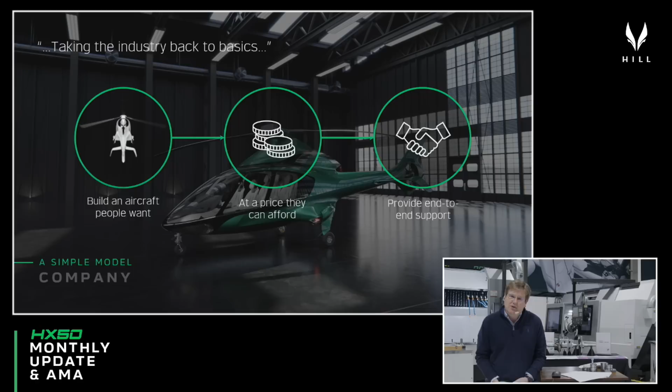So let's make a start with the outlook. Essentially, Hill Helicopters is a company that's taking the helicopter industry back to basics. Our business model is really very simple: build an aircraft that people actually want, deliver it at a price point that they can afford through our vertical integration strategy, and then provide the levels of end-to-end support that customers buying premium products from around the world really expect. It's that simple. And when you do that, the market responds.

As of today, we've sold 540 HX50s, 116 HC50s, and quite honestly there has never been a better time to join our movement and purchase your own HX50. We've got vast pent-up demand in our sales pipeline. I think we're up to nearly 4,000 people now that are just waiting for us to hit a specific gate in the development program, and then they're in. Couple that with the fact that the pound is at a 40-year historic low against the dollar.

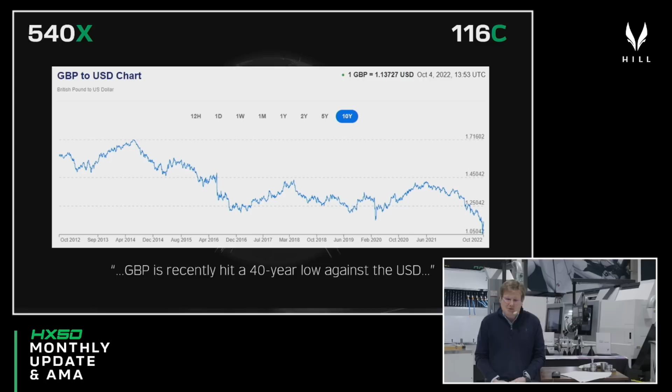Now really could be the time for you to come and join us. And what I'll do tonight is give you a good reason to join us by showing you how we're developing across the program. So those of you in the UK will be aware that our global headquarters, our 335,000 square foot production facility, is currently going through the UK planning process.

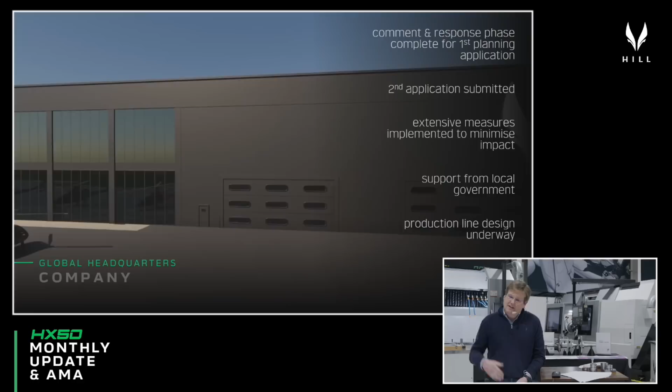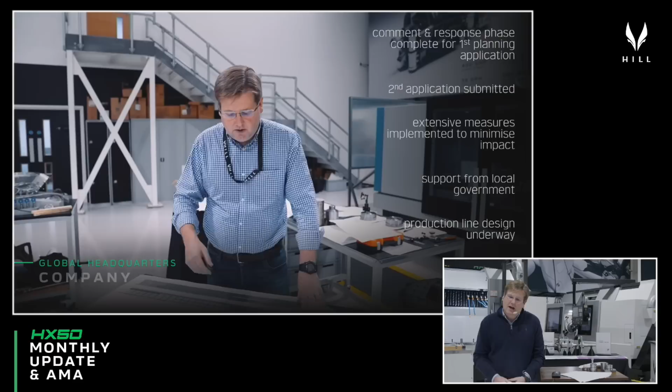Our first planning application, which deals with an existing application for an industrial building on the site, is in the system. All the comments and response phase of that program is now complete, and that's waiting for the second of our applications, which deals with the flying aspect of the heliport we're building, to be submitted. That is being submitted over the next couple of days. They're just dealing with a couple of last issues, and then that will go through, and we expect some feedback from the planners early next year.

To put those in the UK and in the area's mind at rest, the building really takes every opportunity that modern technology affords to minimize the impact our operations have on the local environment. A lot of the operations that traditionally would have been potentially noisy will be done within the building or within acoustic chambers within the building. So we really are going to be the friendliest neighbors possible. We've had great support from the local government, and we're very much looking forward to getting started on building this impressive modern manufacturing facility.

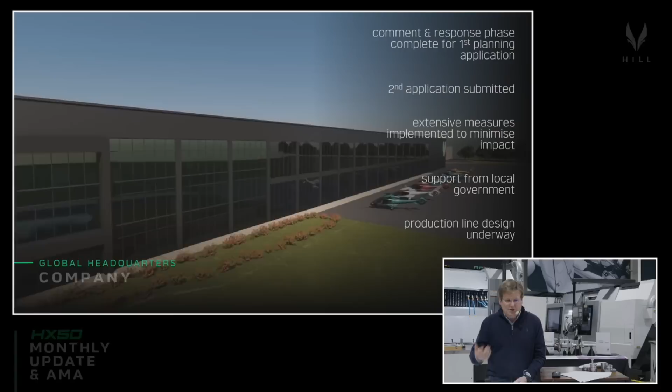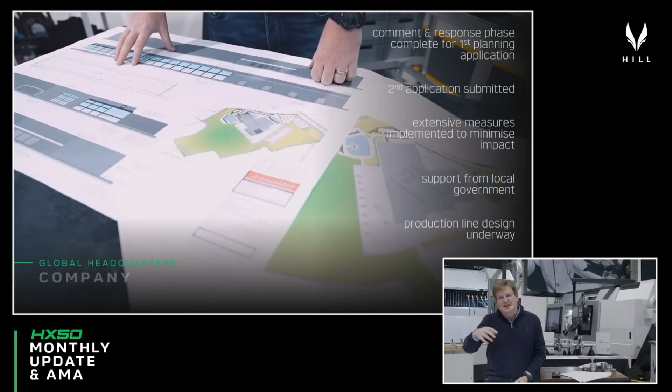To support all of that, it's one thing having planning permission for what amounts to a big box, but there's a huge amount of stuff that has to be done to develop a state-of-the-art helicopter production facility. We've recently taken on a new lead engineer to support us in developing the production, the development of the assembly process, how we organize and manage ourselves throughout production, and the logistics that support all of those activities. That work is now underway, which supports the detailed design of the factory building itself and the support services that go into that.

The event that we've just completed was very much a watershed moment for the company. When a development program is in its early phases, the business needs to be an extremely agile, flexible and relatively unconstrained operation to nurture and support widespread innovation in all the areas you need to create something like HX50. Our organization and the way we operated really reflected that.

Upon getting to the recent event, we've now reached a turning point in the way the business needs to operate, because the design, the systems and the manufacturing processes are sufficiently mature now that we really have to change gears and work in a different way that's much more disciplined and controlled, supporting faster and more efficient progress as we focus on showing compliance with all the necessary regulations we have to evidence that we meet for this thing to be allowed to fly.

So off the back of the event, we've essentially completely reorganized ourselves and upgraded the way we operate as a business into a much more focused and compliance-orientated organization. Sounds very boring, but it's actually really important for what comes next, which is taking those designs and systematically going through them, testing them, proving each part, each subsystem, each assembly, and then the aircraft at large is fit for purpose and robustly meets the very latest airworthiness standards. There's been an awful lot of work going into that over the last couple of weeks.

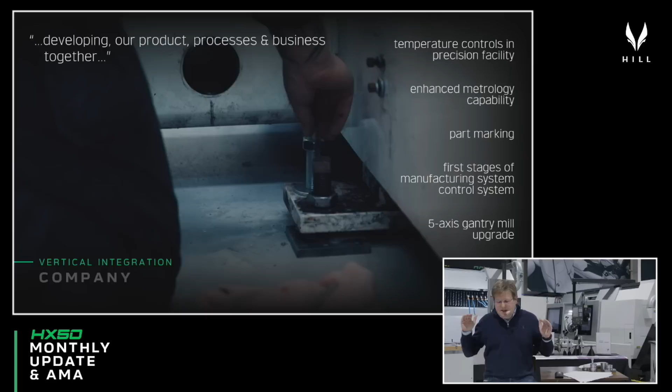In addition to that, as you know, we are simultaneously developing the product, the processes that make the product, and also the business, all in parallel to give us the most expeditious route to market. There's a number of things that have been going on in DC1, 2 and 3 over the last month to enable us to do these things.

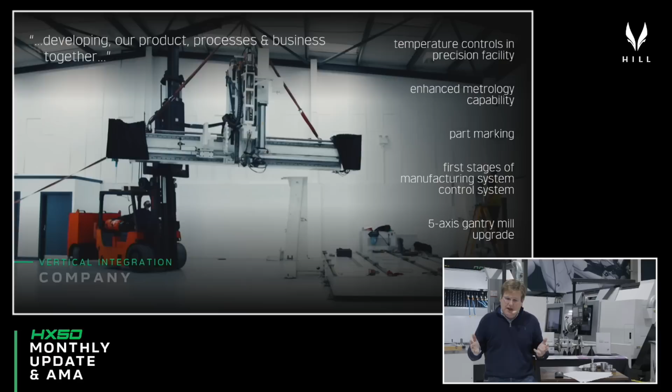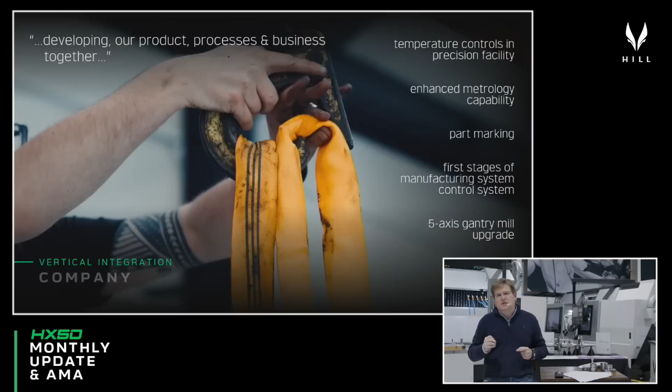One of the things you might notice when you look around the facility here is that we've put temperature controls and air conditioning in throughout the precision engineering facility. You'll have been following that we've been doing a lot of work developing high quality aerospace grade gears, bearings and other precision components. When you're working to the tolerances we need to deliver premium quality, reliable components, you really do have to control everything. So we've put temperature controls in so all the materials are long soaked at the right temperature and stored at a controlled temperature. The machines themselves have stabilized over weeks to a controlled temperature. Even the coolant, the cutting tools, and everything that touches the part is stabilized at a controlled temperature, because when you're chasing single figure microns to make these components, nothing can be left uncontrolled. Otherwise you simply won't be able to do it.

So all of that work has been completed here at DC1, and we're now in a position where we've got the level of control we need over all of these things to repeatably produce these sorts of precision components. We showed you probably two or three months ago that the first of our CMM measurement equipment was delivered. That was really a machine to get us started, handling the bigger, less sophisticated, less tightly toleranced components. While most of the attention is now focused on producing gears, bearings and super high tolerance parts, we need another level of measurement capability beyond that.

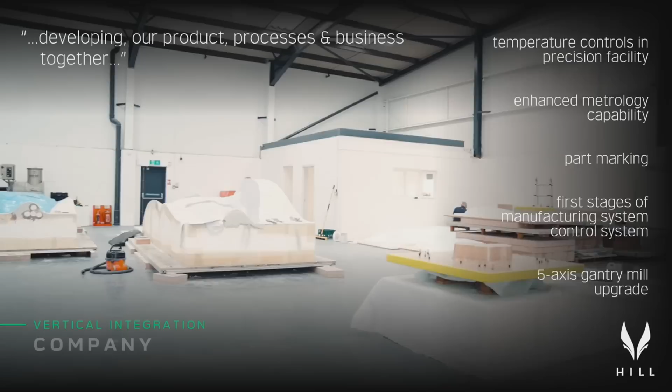So we'll soon be receiving a Hexagon CMM machine, which is actually capable of measuring down to 0.1 of a micron - that's 0.1 of a thousandth of a millimeter - is the accuracy that machine can work to. We're also shortly going to be taking delivery of some very specialized bearing measurement equipment, so that not only while we're developing the products, but also when we're in production, we can measure production items really quickly so that nothing slips through the net from a quality perspective.

We've also invested in part marking systems. We're producing a large number of parts now, and it's important that we can part number them, serialize them, and track all of the parts as they progress through the production process. So part marking and laser engraving is one side to it, but you also need to introduce the manufacturing system control systems as well, and all of that work has been going on in the background.

We're taking a very light touch to that at the moment before we step up to production grade systems, just to keep it simple, agile and responsive as we go through this phase of development.

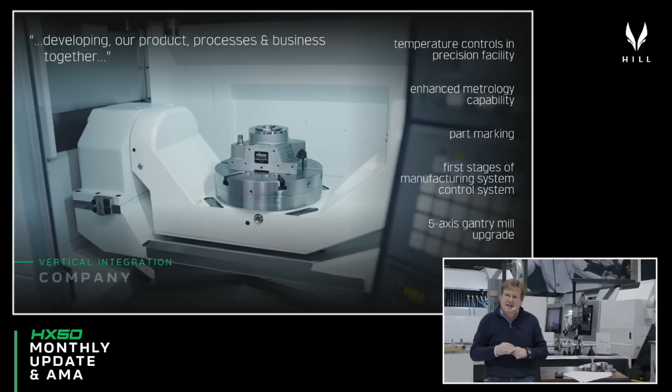The other big news in terms of infrastructure development over the last month is our beloved 5-axis gantry mill machine, which was responsible for producing all of the patterns that built the first set of molds for HX50, is having a brief break, and we're giving it a well-deserved upgrade. We're reconditioning the spindle, the ball screws and bearings, and getting that machine set up for a long slog in production over the coming years.

Over the course of the next 3 to 4 weeks, we should be restoring that machine to as good as new condition, ready to make the production patterns, production foams, production trim tools, and all of that great stuff, as well as doing the trimming on the first carbon fiber HX50 fuselage. Really pleased to see all of that coming together for us.

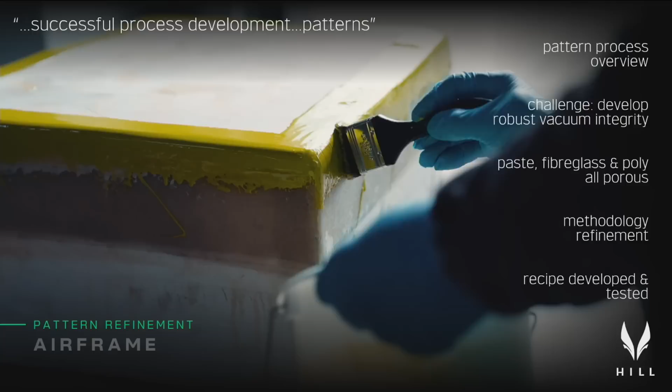Let's now dive into the airframe, and I'll give you an update on how the team's been developing the HX50 monocoque and all of the technologies that go into producing cost-effective, high-performance composites.

You will have watched over the event that we held recently, where we've essentially pulled a range of processes from a number of different industries to fuse industrial levels of cost effectiveness with aerospace grade performance and quality.

Our process is really largely borrowed from the boat building industry, where we take low cost materials to make the patterns, we apply a series of surface treatments - a fiberglass layer, a tooling paste layer - have a secondary machining operation, and then that is the pattern from which we can take our tools to then make the fuselage.

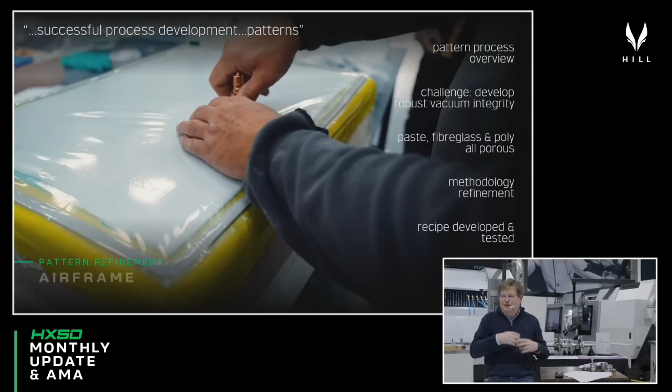One of the challenges with an infusion-based composites process is the fact that you absolutely have to generate vacuum integrity. If you fail to be able to hold a robust vacuum, then you simply cannot infuse.

One of the things that we've been going through and doing very systematically and methodically is the development of the exact recipe that we're going to use for the test fuselages and the production patterns that will go on and make all of your aircraft.

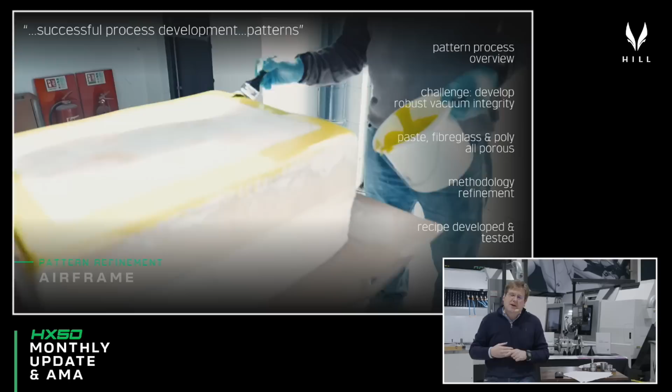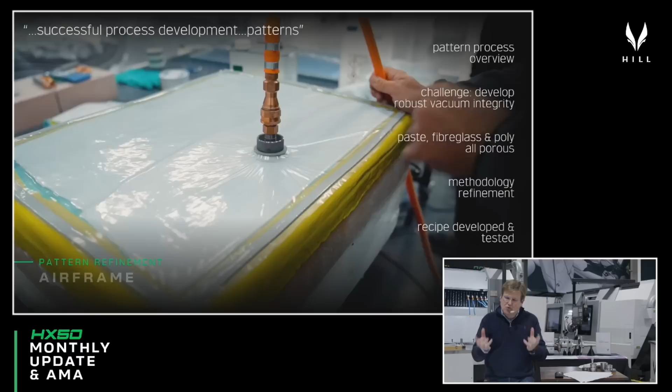The recipe that we've used is essentially illustrated on the slide in the background, where we've had to take great care to make sure that at every stage of the process we're able to create essentially an envelope bag environment around the envelope that draws the vacuum down on the fiberglass.

What you can see over here, if we just move over to this stand, is a small demonstration of the recipe. It doesn't look very sophisticated, but there's a lot of technology goes into this.

So Milan, if you just jump up here a little bit, you can see we've got the conventional polystyrene base, which means we can make vast tools inexpensively. We then have a fiberglass layer on top, which gives the backing material the strength it needs to be robust in operation.

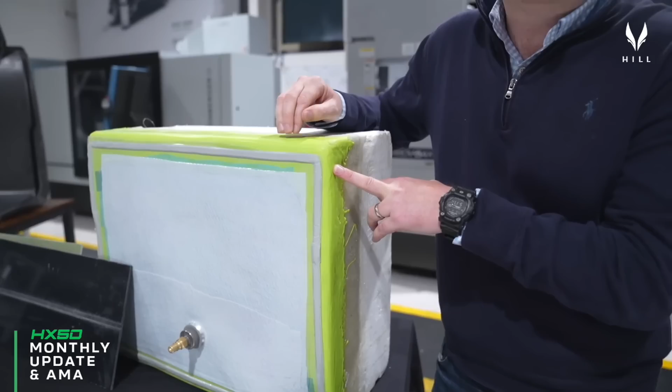And then on top of that, we need to apply a sealant layer, and this is the layer that creates the bottom half of the envelope through which we bag the carbon fiber or glass fiber, depending on what kind of tools we're making.

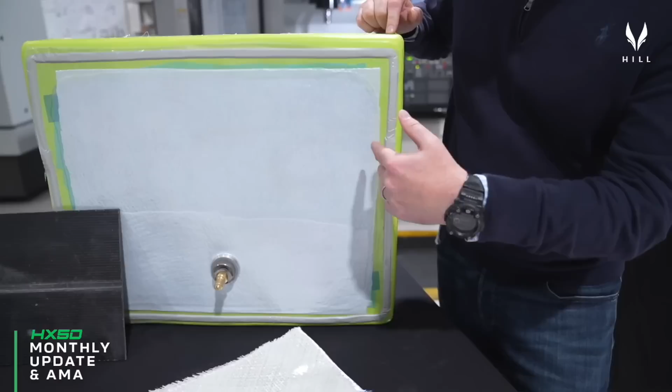What you can see here is that you can apply tooling paste to that top layer, making sure to leave some sealant out to the outside, or we can go directly onto this as we have here. This is a glass fiber mat we've got in there, representative of some prototype development tooling we're making at the moment.

And this vacuum bag has actually held a vacuum now for 2 solid weeks without being connected to a vacuum pump. So, really, really pleased with how this has come together.

And what this now means is those vast patterns that you saw us make on the run-up to the event can now be sealed, and we can produce high-quality, production-grade tools from those relatively inexpensively. So great progress on that front.

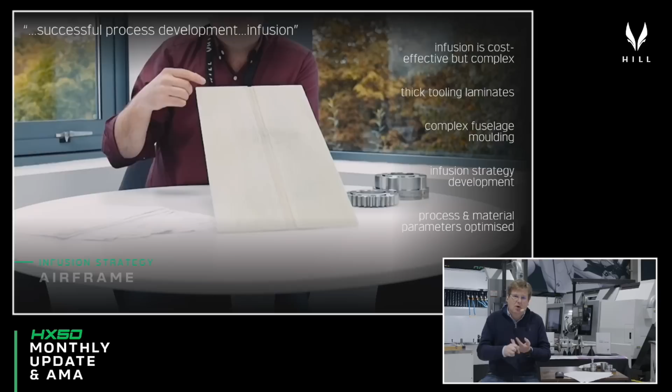The very next stage is to develop the infusion process. One of the key elements of HX50's fuselage and composites is the use of the infusion process, which allows us to come out of the autoclave. It allows us to use inexpensive forms of composite materials and still produce high quality, high integrity mechanical parts. But infusion is pretty tough — it's a more complicated process than using traditional prepregs, and it needs care and effort to develop. Over the course of the last month or so, the composites team have been systematically working through the different process parameters required.

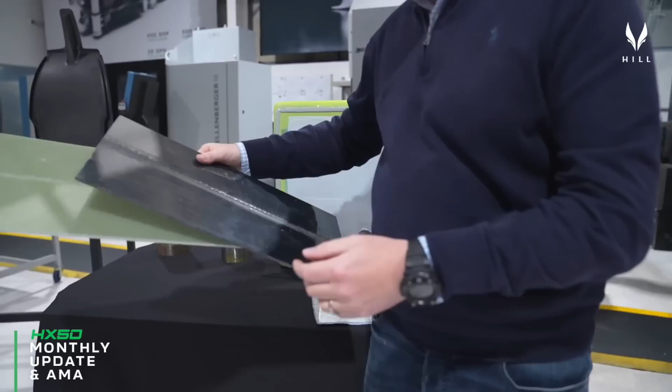Not only to produce the very thin laminates that go into forming the monocoque and the tail boom itself, but also the thick laminates required to produce the tooling and the seal channels necessary to bring those big elements of tooling together. And I'm happy to report today that through the careful selection of the correct fabrics, the correct stack-up of the infusion media, and the correct infusion strategies, we're now able to produce high quality thick laminates in both carbon, which is what the production tools will be made out of, and in low cost glass fiber, which is what some of our development tools are made out of.

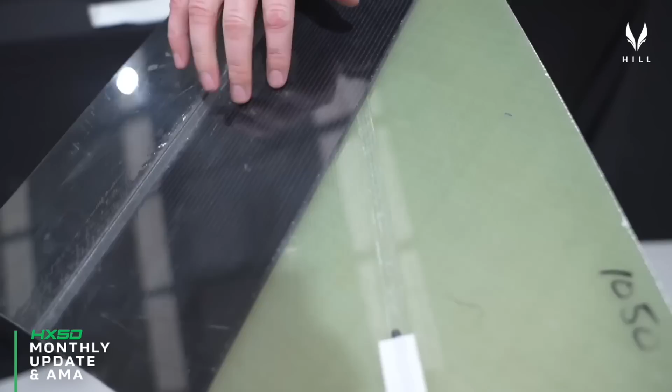You can also see that we're now able to make high quality, high integrity seal grooves within these parts, allowing us to get a robust seal between the individual molds that make up the outer shape of the HX50 fuselage. So all of those key nuanced elements required to make high quality composite parts have now been nailed down into formal processes that we can apply with great confidence as we build these parts for the aircraft.

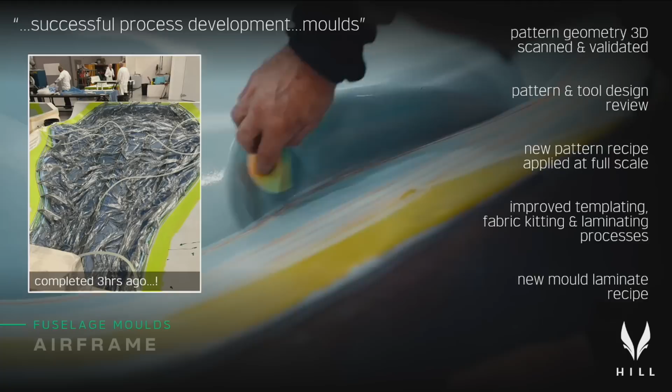One of the other checks we've had to do with the patterns and molds we've been producing is to ensure, like all the other components we make, that they conform to drawing. It's vital when manufacturing parts that you manufacture what you think you've manufactured — the right size and shape so everything fits together and works properly. So to assess the quality of our in-house CNC machining, pattern making and assembly techniques, and all of the surface coatings and treatments applied to these patterns and molds after machining, we've carried out a laser scanning investigation into the A surfaces of all the patterns we've produced.

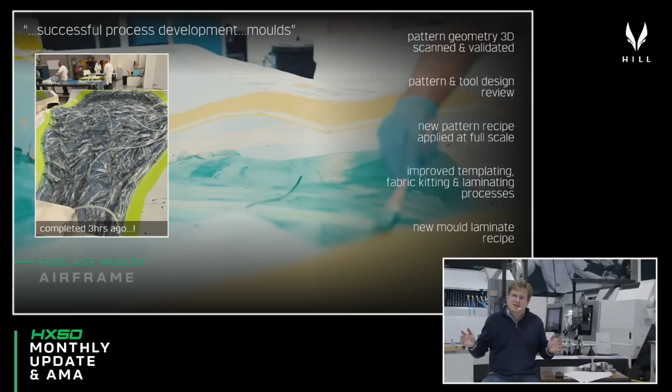So what you can see in the video behind me is a simple laser scanning process that gives us point cloud data, allowing us to see where the parts we've made lie in space relative to what the drawings and CAD models said they should be.

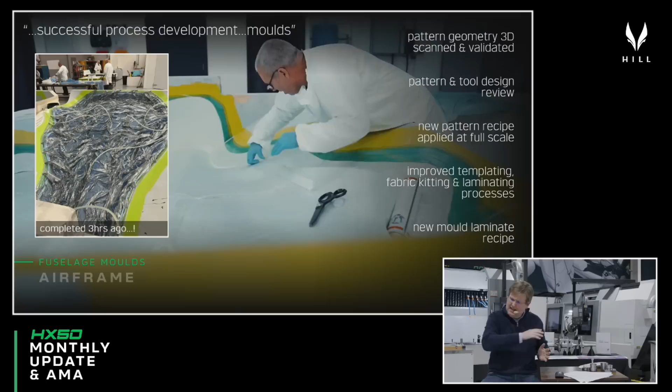What we found is, even working through all of these as absolute prototypes — the very first ones we made — we're robustly holding within 0.5 millimeters in most areas of most of the molds, and in the worst case up to about 1.5 millimeters. For parts of this size with these processes, that's more than good enough for what we need. With a little bit of care, attention and refinement, we should be able to robustly hold around the 0.5 millimeter mark in the production tool. So really, really pleased with how that's coming together.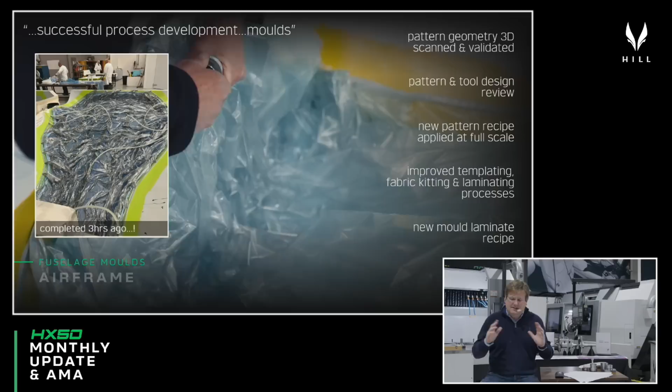Delighted now, we can get those things straight into production and move forward, starting to make this first fuselage. Now, to support all of that, there's a bunch of other stuff you have to do.

We have to get the vacuum bagging techniques right. We have to get all of the kitting techniques so we can cut all the individual pieces of carbon fiber, and in some cases glass fiber, put them together into the stacks we need, and load them efficiently into the tool, getting them to conform to those shapes. All of those processes have been refined somewhat over the course of the last month as well. These aren't quite yet what I'd call production ready — they're not fully automated, still very laborious — but we've got them down to an area where we're really satisfied with how the whole thing's coming together.

So essentially, as of about 3 hours ago, we've taken the first new mold of the belly of the HX50 fuselage using the latest pattern formulation, the latest laminate formulation, and the latest infusion techniques. And that infused beautifully over the course of about 2 hours. I should remind you, that's a really thick laminate, so very challenging for infusion. So that all seems to have gone really well.

Over the course of the remainder of this week and next, we'll be infusing the remaining patterns that are ready to go. And the very next step is that we go and start doing the process development to be able to infuse that first full-scale fuselage.

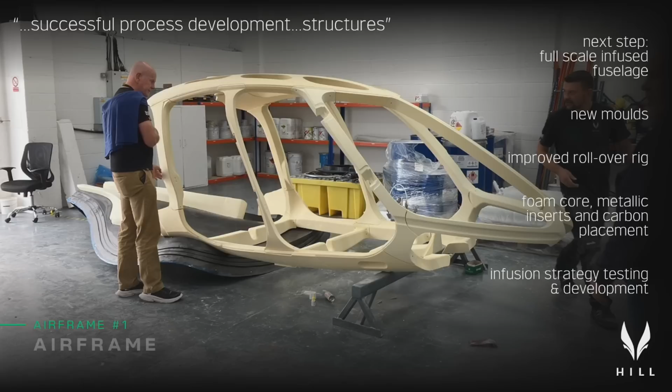So in order to do that, what the guys have been doing over the course of this week is getting all of the foam cores that we've had machined, which essentially provide the guides so that we can lay the B-surface carbon down and create the structural members within the monocoque that we require. Getting all of that assembled, checking tolerances, checking the fit—you can see it there sitting on one of the belly tools that we created previously.

And then we've also got a range of metallic inserts here. These are the inserts that actually get buried within the foam and the carbon fiber, and then these are the things that all of the mechanical components attach to. So this is one of the gearbox mounts that sits on the roof of the fuselage, and we've got similar mounts to mount the tail boom, the undercarriage, and all that other good stuff. So all of these have now been produced, and they're waiting to go into the foams, waiting for us to be able to produce that very first HX50 fuselage.

So really pleased with how all of that's going.

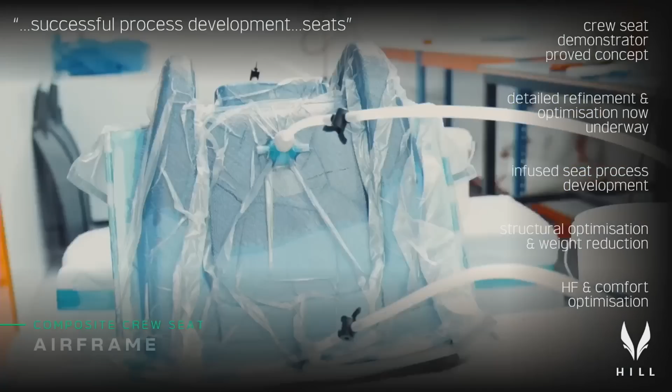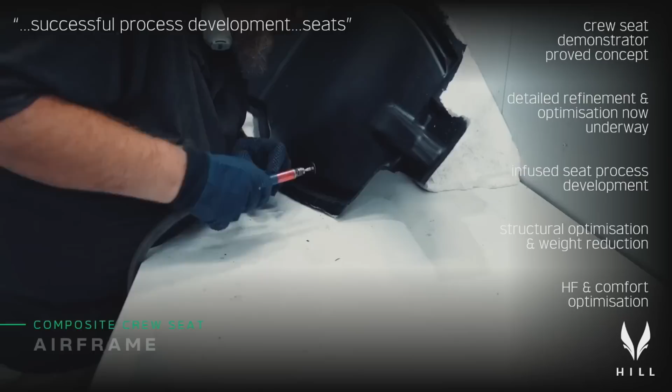During the event, we showed you the very first HX50 crew seat. This was essentially a technology demonstrator, a proof of concept prototype that shows we can produce an infused carbon shell that carries all of the loads we require. Within that, we can nest the mechanical components that house the proven energy absorption devices we've developed, and then machine, sculpt, and shape contoured seating foams, and trim all of that to the level you'd expect in a £500,000 vehicle. We demonstrated all of that, and that was all well and good.

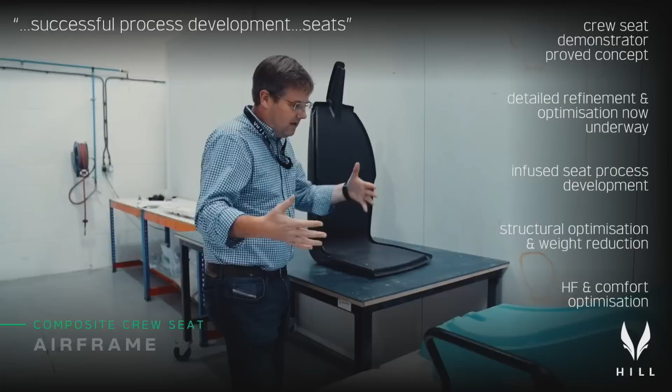But now the real work starts, because now we've got to go and productionize and optimize all of those sorts of things. So what the guys have been doing over the course of the last month has been very much focused on the productionization of the composites. So if we just go over here, I'll show you what we've been doing on the crew seat development.

So what you see here is the technology demonstrator seat that we featured at the event we did last month—a beautifully trimmed, comfortable crew seat that meets all of the parameters we need for the aircraft. Within this seat, we showcased the carbon fiber structural core that goes inside. This is what carries all of the structural loads, keeps you in your seat in the event of a crash and rollover, and transmits all of that back to the airframe. All well and good, but this original one was made with pre-preg to expedite the overall process. So since then, we've been focusing on producing infused parts that get the cost down to a level that's tolerable for a production aircraft.

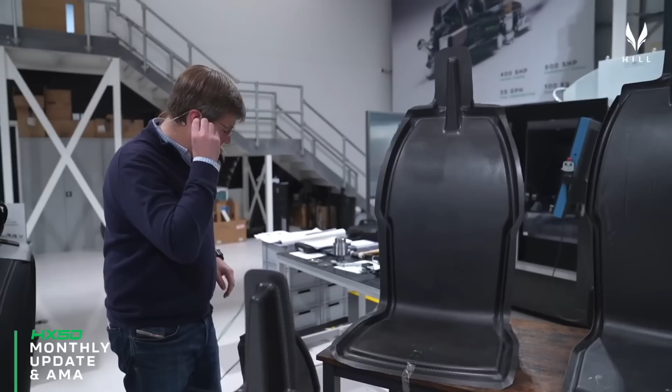So we started by essentially just making the front skin of the seat core. What you can see here is one of the early attempts. It's fantastically light, but this is one of the early attempts with just a couple of plies of carbon in there. And if you look very closely at the top, we've got areas where it wasn't properly wetted out by the infusion process. So we've got carbon fiber there, but no resin, so that fiber doesn't do anything for us structurally.

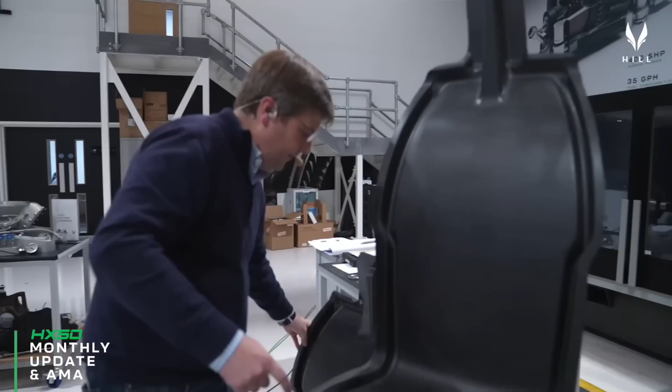So over the course of a week or so, we refined the process, we refined the infusion parameters, and then produced this second example over here, which you can see is fully infused. There's no dry spots here—we've got total composite integrity on this part. And once we've got those parameters locked down, the very next thing that we did is produce a full carbon fiber seat.

So this also has the front skin, but if you have a look around the rear of it, you can see we've got the structural foams in there, and also the B surface that creates the big box sections that carry the bending loads that secure you in your seat in the event of an impact.

Over the course of last month, we've taken the technology demonstrator and essentially proven that all of the production processes we're going to come to rely on produce high quality composites, and also allow us to use the infusion process, which delivers the price point that's vital to us all. Really, really pleased with how that's come along. Let's go back and have a look at what we've been doing mechanically.

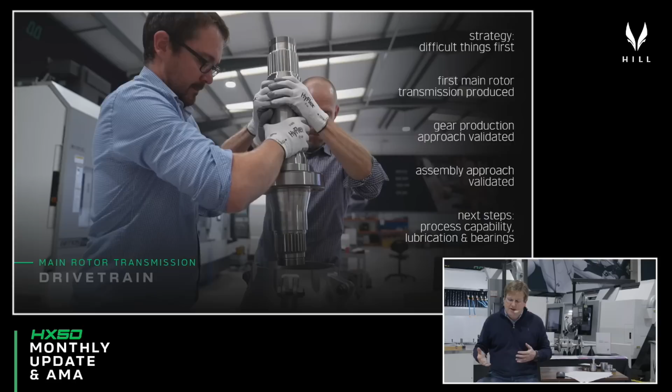So let's talk for a second about the drivetrain development and the GT50 engine. Our strategy has been very clear across the whole project: we do all the difficult things first. In terms of producing a helicopter, helicopters are very much machines rather than aircraft, and the things we really have to produce well and cost effectively are the mechanical drivetrain components and the gas turbine engine. If you can't do that, you can't hit the price point. So that's where a lot of our mechanical team have been focusing their efforts.

On the run up to the show, we demonstrated that we could produce the entire main rotor transmission here on our own equipment, that we could hit the price point, and that we could make these components sufficiently quickly to scale up into production. All that stuff works great. What we've got to do now is progress that towards a production-ready process.

The very first thing we had to do is essentially tear down the main rotor gearbox and go back and inspect all of the components. To hit the deadline for the show, we didn't have time to do all of the inspection we would normally do as part of the prototyping process to validate the dimensional accuracy of these components. So we've taken the gearbox back to pieces again, and all of the gears and critical components have gone off to one of our measurement partners while we wait for our new CMM to be produced.

So the gearbox process has validated the assembly. It's validated that we can produce the gearbox. We've still got the lubrication tests to do on it, which we'll do when we get the whole thing back together again. And what I'll show you now is that we've also validated that we can produce these gearboxes to exactly the tolerances that we require.

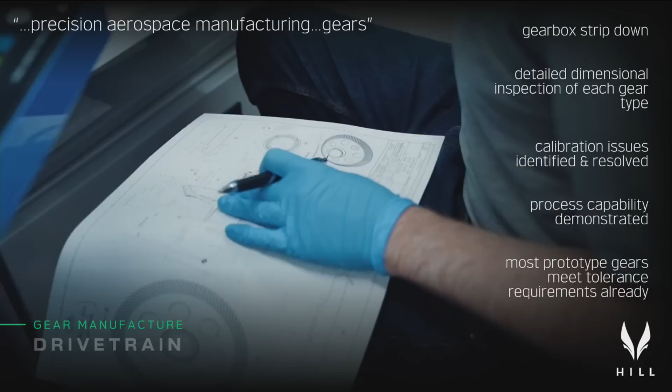Gears are really complicated. When gears mesh together, we have to control the tolerances and geometry of the teeth really carefully so that the load is shared between adjacent teeth uniformly, controlling the size of the contact patch. If you don't do that, you end up with fatigue and wear problems that would be horrible. The level of precision and detail that goes into designing a helicopter transmission is extreme.

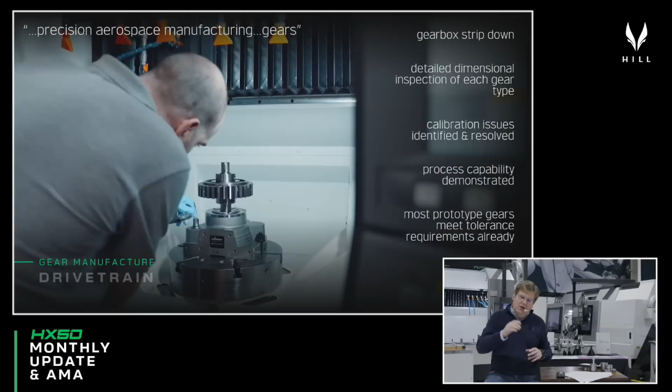So what you can see on the slide behind me is that Mark has taken all of the gears we've produced up to Dontyne, our partners up in Newcastle, and they've been using their gear measuring equipment to profile the geometry of the gears and verify where we are in terms of the tolerance range we've been able to achieve. These are the reports we've had back from Dontyne.

I'm delighted to report that we are currently making gears, even the prototype gears, with the exception of a couple of outliers, all already hitting the tolerances that are conventional for US helicopter manufacturers. So on the equipment we've got here, based on the cost base we've declared, we're able to make these gears and gearboxes, and we're able to do it right now.

So that isn't the end of the process. There's a bunch more process development to be done in terms of the hardening and various other things we need to do. What we've got to do now is go and optimize these processes and see how far we can back off these quality parameters to maximize the productivity of each of the machines.

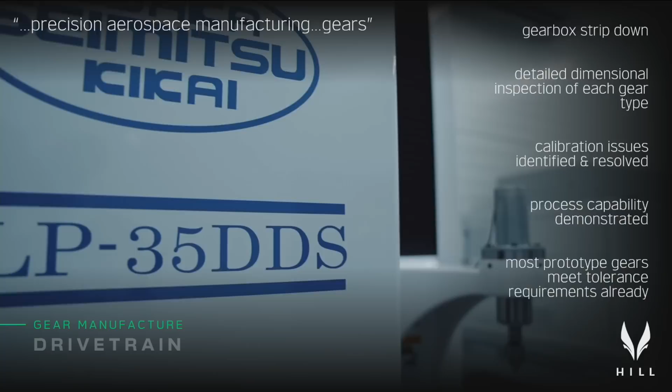We've had a couple of calibration issues, which were fascinating. We were able to see an error in the machine's calibration in the reports on the gears. That's subsequently been fixed. And I should also say that these results were all generated before the latest temperature controls and production controls were put in place here.

So over the course of the next month, we'll do the hardening on the gears, we'll do the hard machining, and we'll also map out process capability so we know exactly where we can pitch these tolerances in production. So really, really pleased to report that we're on top of things with the drivetrain. As soon as the gearbox goes back together, we'll verify the lubrication system, and then we're on to bearings.

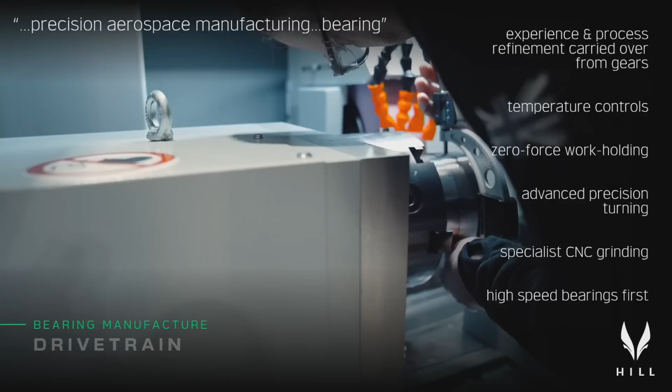In terms of bearings, this is one of the other areas where we've had to take an unusual step for a small manufacturer and produce bearings ourselves. This is very much based on controlling costs so they remain acceptable for the GA market. In the existing transmission we've produced, we've used off-the-shelf industrial bearings just to demonstrate the function of the gearbox and everything else that goes into it. What we're doing now is substituting those bought-in bearings with Hill manufactured bearings.

Over the last 3 to 4 weeks, Mark and Paul have been driving down the tolerances and controls on the bearing races on the first in-house bearing we're producing. We're producing a bearing that will work in this form factor here.

What you can see here is we take raw material, as we do with the gears, and using our CNC lathe, we're able to hard machine this specialist bearing steel down to around 4 to 6 microns, then give it the finishing licks on our CNC internal external grinder. We've developed a range of temperature control processes and some very specialist work holding so that we can support these components in the machine without having to clamp them in a 3-jaw chuck.

If you look at the video, you can see the roughing is done while you still hold it in a 3-jaw chuck, but to get the finished profile into the bearing, it's vital that you don't put any radial distortion into it by clamping it inappropriately. So all of those processes have been developed, and we're currently producing the first of the in-house bearings.

True to form with all of this, we're going after the most difficult ones first. The bearing we're producing is actually the forward gas generator bearing - that's a bearing that lives in a hot, difficult environment and sits at 50,000 RPM for 5,000 hours. That's the one we're doing first, because if you can do that one, you can do any of them. As they get bigger, it gets easier to hit the tolerances.

I've talked to you a little bit about the issues we've been having making sure the secondary air system is as optimal as it can possibly be. Let's go and have a look at the first gas generator we've produced, and I'll explain what we've been doing and why on the actual hardware.

This is the very first GT50 gas generator rotor, and this is a design that's been stable for around 2 years now. We've got a single-stage centrifugal compressor of a very well-known and understood design, a 2-stage compressor turbine, cooled first stage nozzle, and uncooled second stage nozzle.

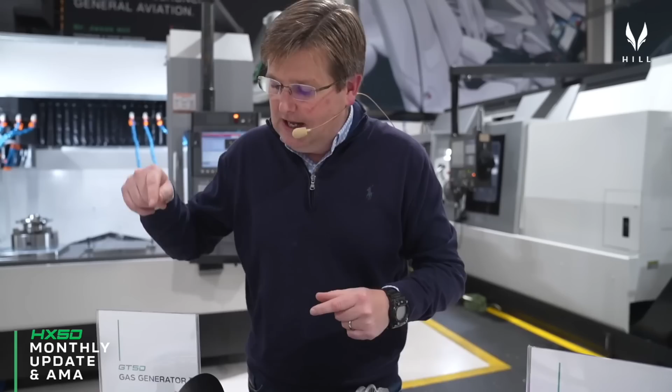Now, the most difficult part about designing one of these rotors is that because they spin so fast, you can only accept a very, very small bearing to support the shaft. Because if the bearings get too big, the centrifugal loads on the balls will become so high that they lift out of their lubrication film and skid rather than rolling, which will rapidly destroy the bearing.

So what we've been having to do, and the implication of that, is that there's a limit to the axial loads you can take on the rotor. So we've been optimizing the secondary air system so that we limit the load on the bearing to just enough. It can't be too big, it can't be too small, it's got to be just enough so those bearings operate in their sweet spot and work properly.

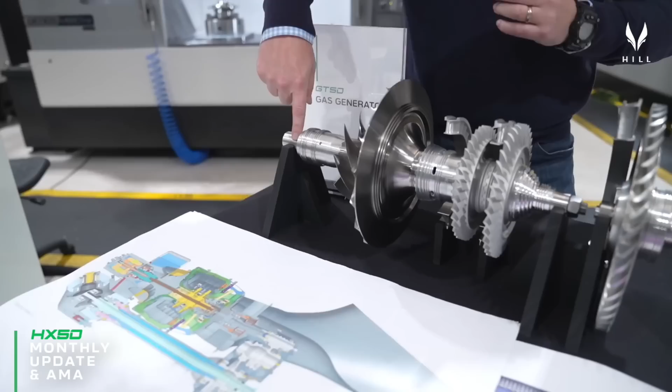Now, what we found is that although the 2-stage compressor turbine is a really sweet, efficient design, it does make the secondary air system more complicated, and it does lead you to a relatively small diameter turbine. So what we've opted to do is move to a single stage compressor turbine.

So this is the updated general arrangement you can see here. We've still got the single stage compressor, but now we've got a single stage compressor turbine to power that. This thing is slightly higher loaded, but with the improvements to efficiency we get in the secondary air system, the overall benefit on the engine is a slight efficiency improvement, even with a slightly higher loaded turbine.

So what that does is shorten the length of the engine, reduce the number of superalloy components we've got to make, and give us a small increase in performance while giving us a much more robust and reliable secondary air system. So that's the work the guys have been focusing on.

The secondary air system is now mature. The updated compressor turbine is currently being respun at the moment, and that will cause a slight growth in the annular combustor as well. All of those things are in hand, and that should allow us to, subject to analysis, freeze the design of GT50 ready for the remaining components of this assembly to be produced so we can get the thing on test. Really pleased to see that coming together.

Let's have a look now at some of the parallel development we've been doing on the manufacturing processes required for the GT50 engine.

We've talked previously about the machined components. You've seen us make the compressor. We've got casting processes in development at the moment to make the superalloy blisks and nozzles. We're looking at 3D printing for some of the other bits and pieces. But one of the areas we now need to focus on is the precision fabrication of superalloys.

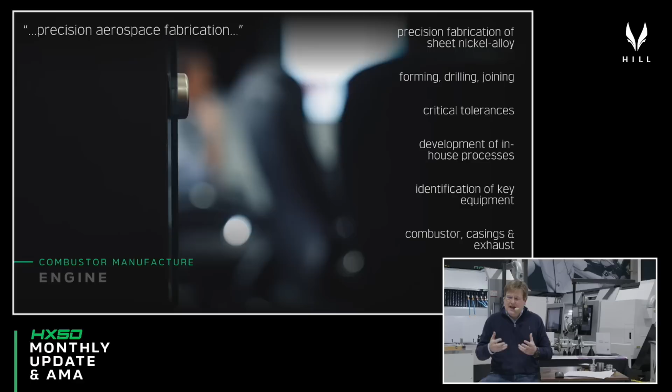So, sheet metal superalloys. And for that, there's a bunch of operations we need across a number of the components in the engine. We need to be able to roll, press, form, drill and join sheet metal components to make ultra lightweight precision metal casings, exhausts, and also the combustor liner.

We've done some exploratory work with a company in the UK to provide a 5-axis machine that can simultaneously weld the individual layers of the combustor together, as well as drilling the 2,000 plus precision holes we need in the combustor liner to feed in the dilution air and also to feed the blanket of cooling air over the metalwork.

We've managed to work with those guys. We've proven that process can do what we want it to do, and we've shown that the economics of that work for us as well. So we're now in a position where we've identified everything we need to make the entire engine. There's a little bit of work left to do on castings, but beyond that, we're in a great place with the engine.

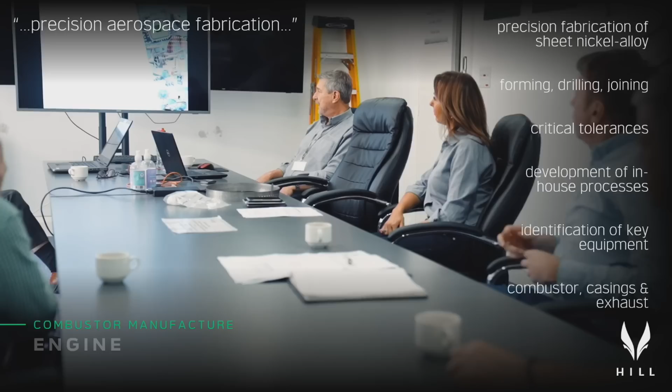In addition to procuring the external third-party machines, we've also been building some of our own equipment. So if we quickly go and have a look at this piece of equipment over here, this is called an expander. The combustion liner we need to make is actually formed from sheets of superalloy nickel. It starts as flat sheet, it's laser cut, and then it's rolled into a circle, welded, but of course that isn't a perfect circle.

So what we need to do then is pop this thing on a machine, and we've got some pie slice tools that go into this machine. This thing's pulled down by a hydraulic ram, and that expands these things so it's perfectly round and to size. Then we can stack these rings together, they go onto a fir tree kind of jig and fixture, and that's when we can put them into the 5-axis laser to drill these cooling and dilution holes, and also weld these things together to form the annular combustor.

So the combustor's well on its way at the moment. We're just waiting for the respun geometry for the new single-stage compressor turbine, and then that's the sheet metal work ready to go out for prototyping. Really pleased with how that's coming along as well.

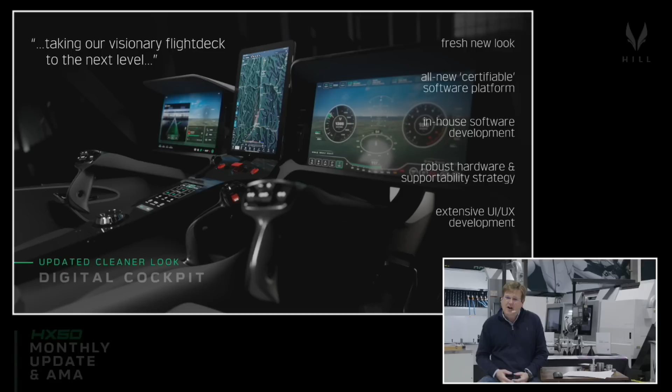Okay, so let's talk about the digital cockpit for a while. During the event, we introduced and showcased a fresh new look for our iconic digital cockpit. The DigiCockpit is a very simple idea: just do what's necessary and nothing else, manage the workload for the pilot, and make VFR flying as simple and intuitive as it possibly could be.

That's the idea, but behind all of that there's a bunch of really technical stuff you've got to get right. Fundamentally, certifying and approving software is a relatively big deal. It's complicated and it's long-winded. So it was important that we built the digital cockpit on a fundamentally certifiable platform. A lot of the work over the last few months has been about transitioning the concept of the DigiCockpit into an environment where we can eventually certify it, and in the short term, approve it for use on experimental aircraft.

We're developing all of the software both for the DigiCockpit UI and UX, and also the interface applications that communicate and control with all of the third-party peripheral systems like the radio, the transponder, the GPS, the AHRS, and all that sort of stuff, developing all of those in-house.

And then, of course, we've developed a much more robust approach to the supportability of this thing in the future. It's no good having a quirky screen size that we can buy today but might not be available in 10 or 15 years' time, leaving a simple fault causing a big problem for the aircraft. So we've dealt with all of those issues and are undertaking a very significant development at the moment on the UI, UX, and all of the underpinning hardware behind it.

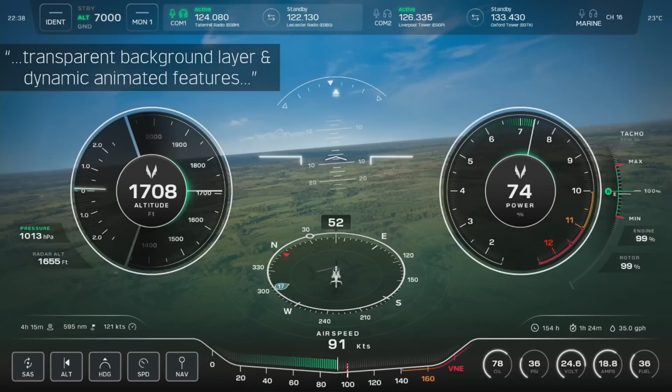So for those of you that haven't seen it recently, the DigiCockpit has got this fresh new look. Same basic concept, but with much cleaner graphics. The key point we're going to talk about today is how we've been developing a layered approach to the DigiCockpit. What you can see in the blacked out areas is the radio bar, the control bar along the bottom, and the fundamental gauges.

Behind that, what we're showing here is a fixed synthetic vision image that represents your artificial horizon. Now that transparent layer can be populated by synthetic vision, by a background 3D computer-generated image, or by a feed from a camera. Over the course of the last month or so we've been developing the technology required to bring all of that together in a way that will eventually be approvable and then certifiable for the HC model, because we want consistency between the two platforms.

The platforms and hardware we're developing are inherently modular. All of the peripheral systems—the radios, the AHRS, the audio panel—are all interchangeable, so we can update the DigiCockpit with no impact on the user, swapping out those units as we see fit in the future. We're presently working with Trig on the supply of radios, transponders, GPS sources, and a bunch of other things, and PS Engineering for the audio panel.

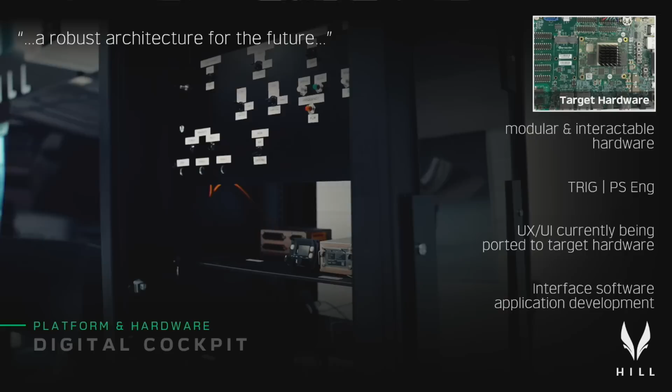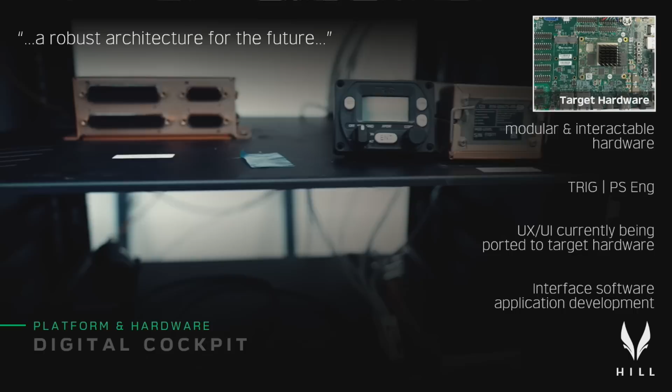We get those questions a lot, so I'll answer that here. We're also in the process of porting the digital cockpit, which has been prototyped in a Windows environment, to the target hardware. What you can see in that little image at the top is the development board of the target hardware that will actually run the UX on the aircraft. We're about to install that on the avionics test bench, which I'll take you to in a second, and get it all connected with the peripheral systems so we can test as we go through development.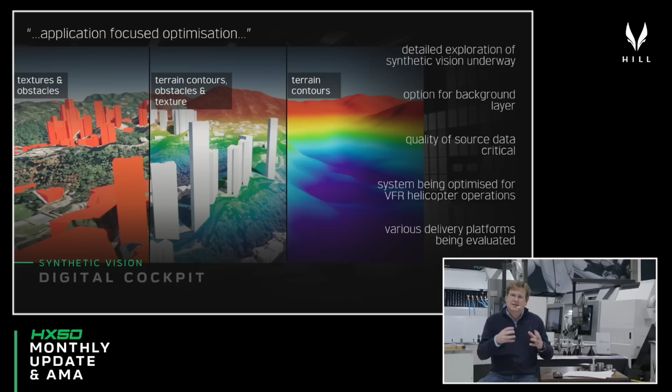One of the areas we're going to showcase for you shortly is synthetic vision. One issue is that a lot of synthetic vision systems aren't terribly well set up for VFR helicopter environments, where we're not overly bothered by the terrain itself—we're much more interested in using the terrain as a 3D context for obstacles, wires, and things like that. Over the last month we've been gathering a source of data for terrain and wires with sufficient credibility to make a synthetic vision system a safety advantage, rather than running the risk of presenting misleading information that people would then come to rely on.

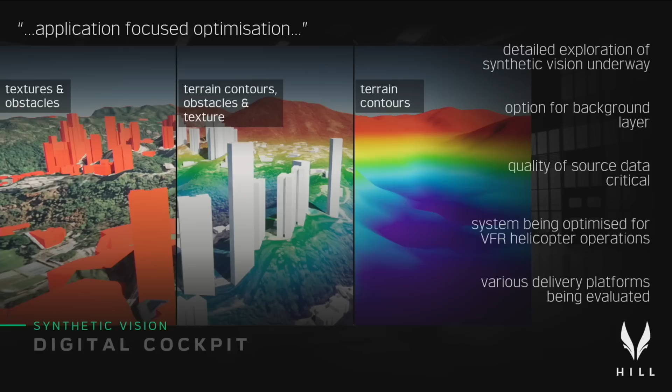So we've been simultaneously sourcing high credibility data to use within the synthetic environment, and then exploring lots of ways we can render and display the synthetic vision environment. These are just some crazy examples I can show you to make the point that you can do anything you want. Our preference at present is muted greys with contour colouring for terrain, and 3D visualizations of wires, buildings and obstacles to draw attention to the things that matter to VFR helicopter pilots. We'll go and demonstrate that in just a second.

All of this stuff is being prototyped and developed on the real hardware, with the actual screens, with the DigiCockpit user interface on our avionics test bench. So let's go over and see Eric. I'll introduce what the test bench does, and he can showcase how initial trials with synthetic vision are coming together.

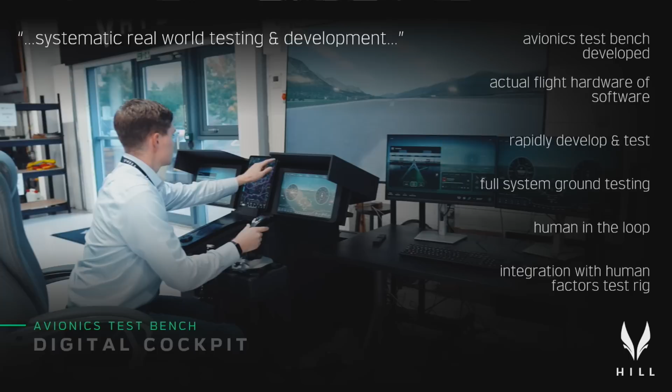So what you can see here is essentially the avionics test bench. The avionics test bench is a simulated flight environment. We have an X-Plane flight simulator running on the big screen, and then we've got the digital cockpit test bench here that Eric's currently operating. On the big screen we've got the X-Plane simulated environment, and down on Eric's screen we've got one version of how we can display our synthetic vision environment.

Don't pay too much attention to how it's rendered at the moment. This is really a technology demonstrator for us to get the mapping, the rendering, and all of the runtime environment working in the background, and eventually ported onto the target hardware so we can assess the level of this stuff within the DigiCockpit environment.

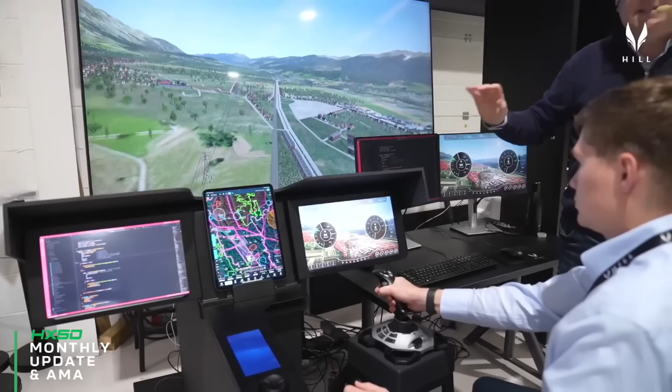What you can see here is that Eric's got a full screen of the synthetic vision, and then we can overlay the digital cockpit gauges on top. There we go - that's live synthetic vision synced with a simulated flight environment, with the DigiCockpit operating over the top. As I say, don't pay too much attention to how it looks at the moment. This is just proving that we can stitch the elements of technology together.

So that's synthetic vision, but this test rig does much more than that. What this does is allow us to verify and test each and every element in the avionics system as we develop it. We don't assume anything is going to work, we don't rely on things working out the box. Everything has to be tested.

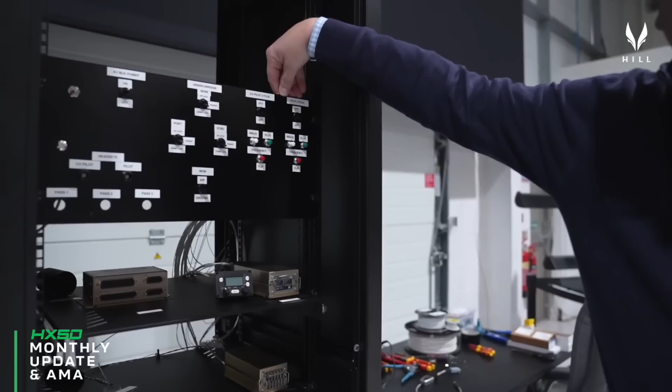So what we've got here is a control panel that simulates some of the flight controls you'd have in the aircraft. The plus and minus buttons and the frequency flip buttons are the buttons you'd have on the cyclic - again, these are just buttons for the test rig, not the ones you'll have in the aircraft. We've got some mode switches up here to control push to talk or hot mic.

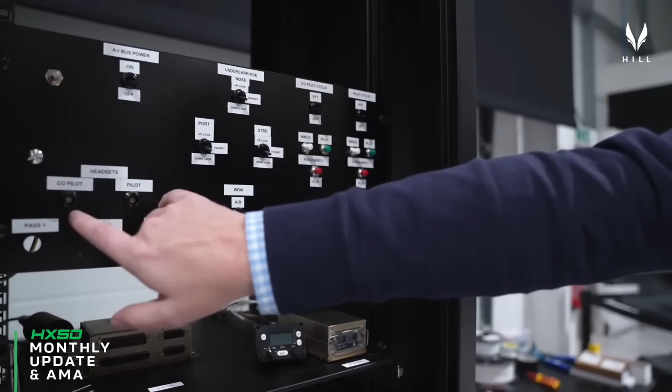We've got undercarriage position switches to trigger signals in the digital cockpit environment, and then of course we can plug in the pilot, co-pilot and passenger headsets to route into the intercom and get all of that stuff working properly, with the IPI and all the other stuff we've developed.

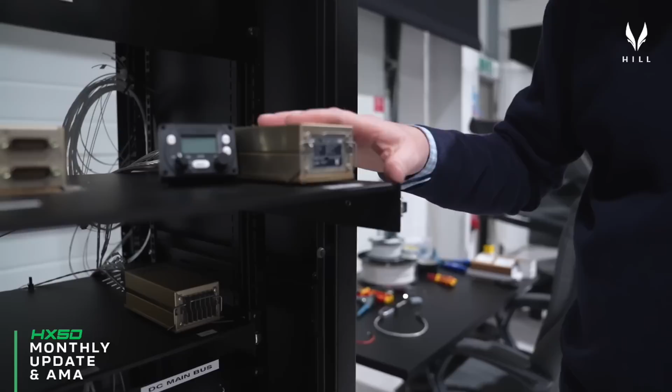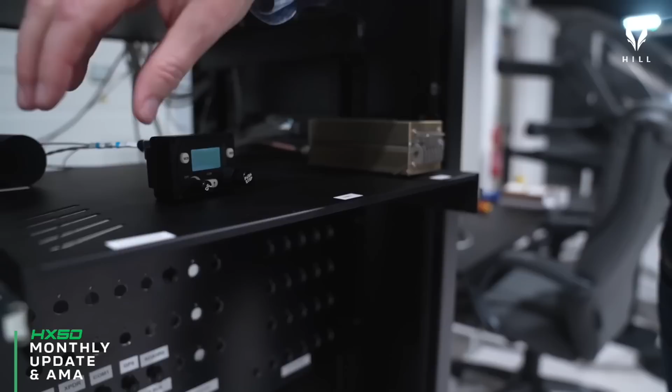As I've said, the actual hardware devices that form the backbone of the DigiCockpit are approved, TSO'd, certified devices from Trig. So this is your ADS-B transponder, this is your PS Engineering intercom system. That's the secondary head unit we're using to verify things are working properly with the radio and the transponder. Then we've got a single com radio here, space for the second com radio and for the nav radio, and you can see all the wiring looms starting to be developed and tested, and the processes we use for all of these things are being proven on test right now.

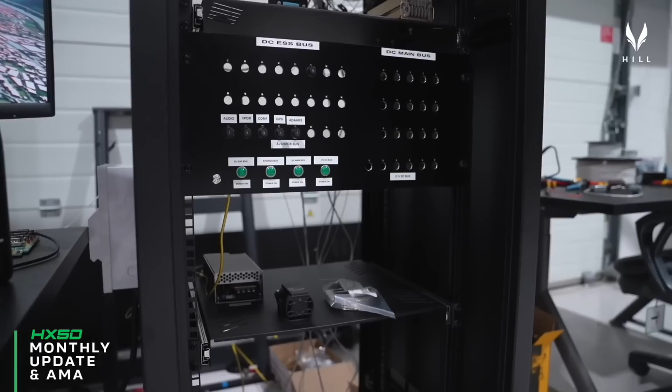And then down at the bottom we've got a fairly conventional looking circuit breaker panel. The jury's still out on how we do this, whether we use conventional circuit breakers or electronically controlled ones. The guys are looking at that at the moment.

So this is the avionics test bench, and this is the DigiCockpit springing from concept into life, into real hardware, and the rate of progress here is tantalizing. It moves very, very rapidly every day, thanks to Eric, Martin, and the rest of the guys on the avionics team. So really pleased with how all of that's coming together for us.

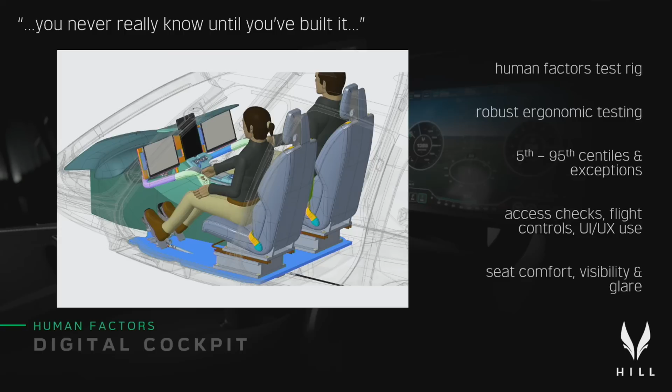One of the other things we're going to do with the avionics test bench and that simulated environment of the DigiCockpit is integrate it with a human factors test rig. One of the things we've found as we've built more of the aircraft is you never really know how the thing's going to work or feel until you've built it. So building things really early in the process is very important.

What we're doing at the moment is taking that first fuselage we're building and integrating it with the DigiCockpit. We're looking at issues such as robust ergonomic testing, making sure the biggest and smallest of our customers can fit, are comfortable, and have the range of movement on the flight controls they need. We're making sure they can get in and out comfortably, making sure we've got pull handles and things in convenient locations, and all that basic stuff.

It sounds easy, but it's actually really difficult to do well, particularly when you've got such a complicated shape as we have. Then there are other things like robust comfort trials on the seating, and dealing with irritating issues of glare and reflection. Once we've got those windows on the front of the cockpit, we can go through and prove that the DigiCockpit doesn't inhibit your range of vision and doesn't cause irritating reflection problems.

The orders have been placed for all the bits and pieces we're having mocked up to do the cockpit demonstrator, and those will be coming together over the course of the next month.

Just to give you an update on a couple of areas I'm not ready to report fully yet, because there are still some very sensitive things going on in these areas.

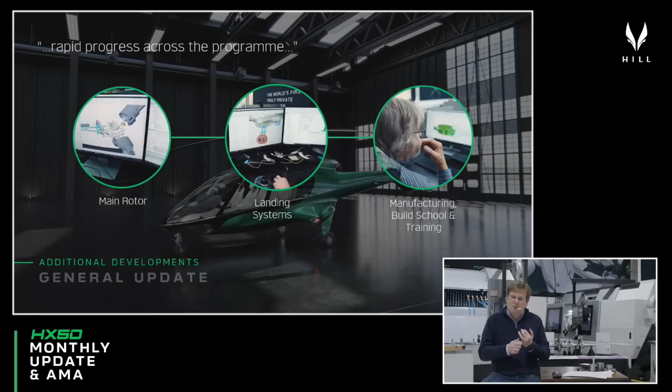There's a bunch of stuff going on with the main rotor. It's been a major focus of activity since the event, as I said it was going to be. We've got some really clever packaging solutions to get that hub packaged within our hub cowling, which is crucial to our drag and performance. That's going really well, and we'll be in a position to report more of that fairly shortly.

There's a bunch of work going on across the range of landing systems that go onto HX50: the conventional wheeled undercarriage, the HeliMove system, the skid system, and the floats. We've started in earnest some concept work on the floats, which is a subtle change in direction from what we originally said we'd do, but I think it's going to work and package better.

So we'll update you on that, but leave me for a little while longer to get it to where I want it before I report it. The fundamental undercarriage and the oleos are coming together really nicely. We're on weight target for that, so there are no skeletons hiding in the closet there.

We've also now kicked off a major program of manufacturing system design, taking all the parameters we optimize and learn here on how we make stuff, and coordinating that into a modern and efficient manufacturing system.

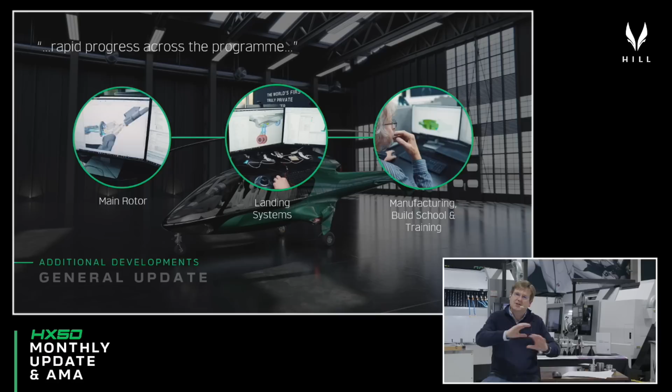One of the things we're looking at is the extensive use of augmented reality to support the build school, teaching you how to do the things you need to do when you join us at the factory, and also how we support the field and support the aircraft with technicians all over the world. We've got some demonstration work going on Friday this week on AR, and I think that will be a very important theme throughout everything we do when we interact technically with our customers and the support operatives out there in the field.

Really pleased with how all of that stuff's going. So that's the end of the formal presentation.